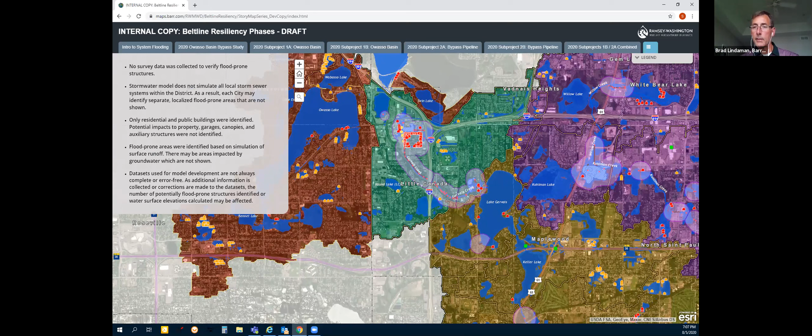Okay. And again, since I can't see everybody any longer, let me know when you're ready to go, Marge, if everybody's back and beverage in hand. Not making any judgments on what beverage you have. So Cliff is back. Marge isn't quite back yet. Brad, we'll go from you to me to Sam. Okay.

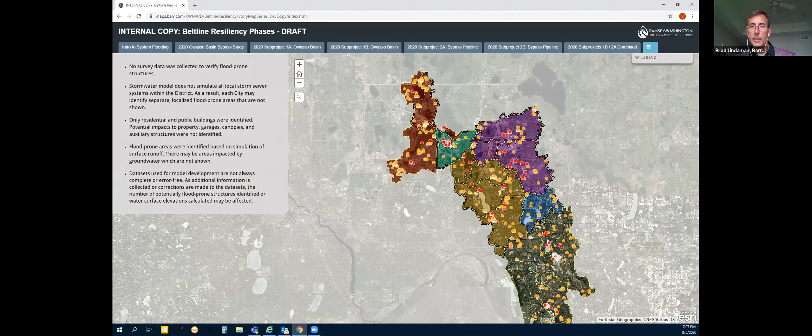So Sam, you still have control, right? Yep. Okay. I'm gonna zoom back in on that Owasso. You had it perfect before with the cloud there, right about there. That should be good. That should show up there. Yep.

I have a question, Brad. Yep. Will this be available for us to look at on the website? It will. Yes. And is there a report to go with it? Not yet. We're going to talk about that because a key piece of this is having an understanding of each of these elements to help us guide how you would like to see the report finalized. Because

I'll wait until Marge gets back, but that was part of kind of my overview of this. Oh, I'm here. I just wasn't sitting down. Okay. Is everybody else, again, I can't see everybody's picture anymore. Yeah, I think everybody is okay.

So what we're going to do, we're using the story map, and you've seen this story map in different forms as the Beltline Resiliency Study has evolved over the past couple of years. And so we're going to use this to look at details of what each of the feasibility study areas entailed, so you can get a better handle on how we looked at basically reducing flood risk in each of these areas.

A key piece of what we want to achieve tonight is having each of the managers be familiar with the story map and how to look into it further, because as I said, Larry, we're going to post this out to the district website. And so you can operate it and look at it and make sure you're comfortable with how we arrived at the recommendations we're going to give tonight.

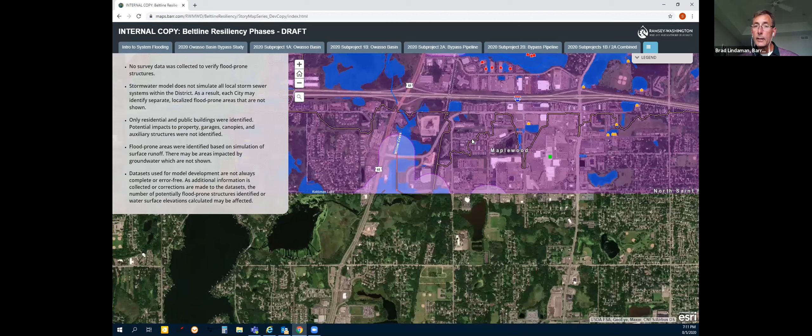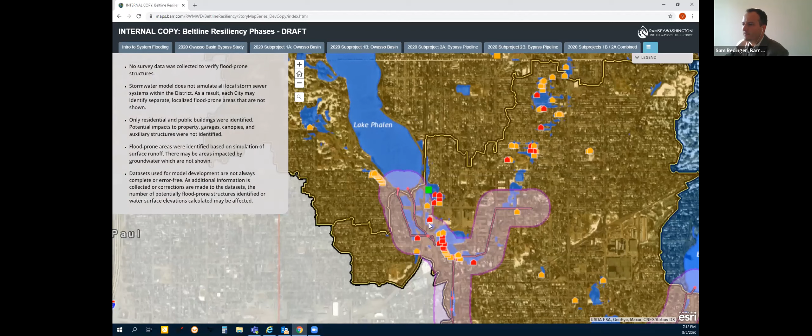So if you could scroll straight south to the south end of Lake Phalen, Sam. You want to go all the way to Lake Phalen? Like south end of Lake Phalen. Yeah. Got it. And so what we just looked at, we're in the upper portions of the Phalen chain, but another area that was mentioned in the status report is the Ames Lake area.

This also was identified in the Beltline Resiliency Study as an area that needed attention. So we'll talk a little bit about that near the end of the presentation, but just know that that's kind of the orientation when we say Ames Lake, it's to the south of Lake Phalen.

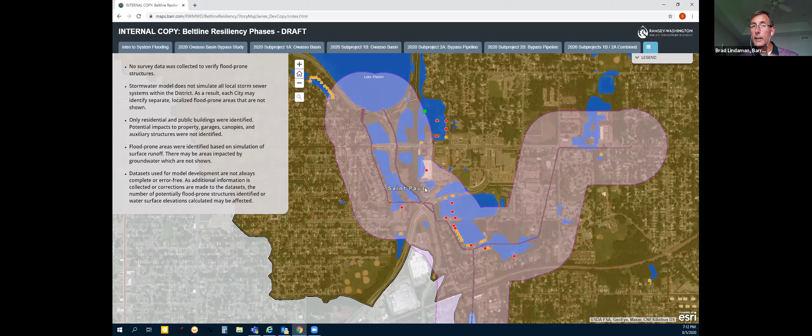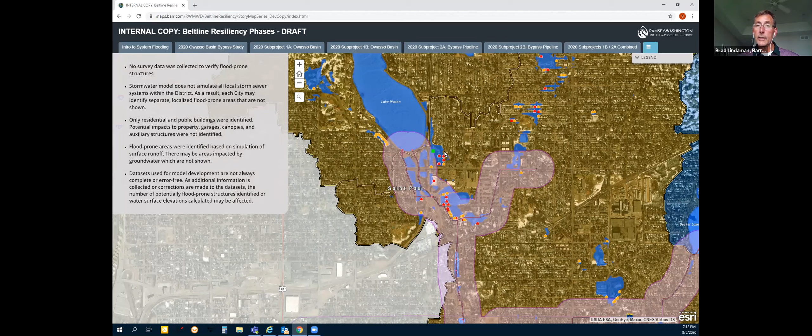And then the fourth component of the study that I will just briefly hit on at the end of all of our discussions is the Kohlman Creek system. And so if you go back up to Kohlman Basin and go straight east of Kohlman Basin or Kohlman Lake. Over here.

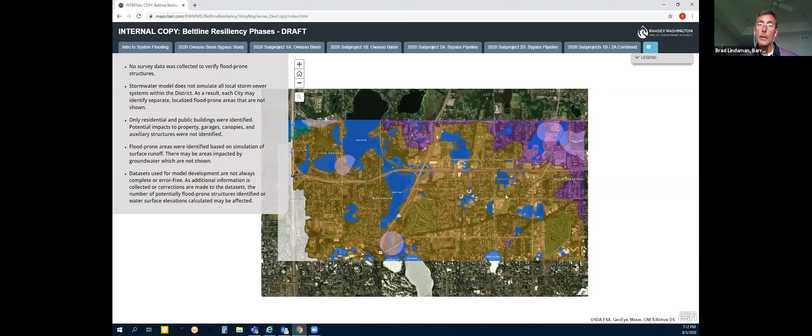This was not part of our scope for this work, but we do have a lot of information in the resiliency study that identified areas along Kohlman Creek. And again, this is Markham Pond. This is the PCU Pond, or formerly known as Target Pond, North St. Paul Urban Ecology Center. All of these areas have flooding issues along them.

But what we're trying to do is give you a sense of what it would take to address many of these flooding concerns. And so that's the order of how we're going to go through things this evening. We want you to be familiar with where these are in the district, how to navigate the story map, and then, at the end of this, help our team from Barr and the district staff guide us in one direction or another when it comes to the Owasso work, because depending on the direction that the Owasso area takes, it will help inform many of these other elements that we'll be talking about on the other side of the district.

So with that, I'm going to turn it over to first Matt Metzger, who has been one of the leads on the Owasso study, and let Matt explain the alternatives they looked at and how we arrived at a recommendation.

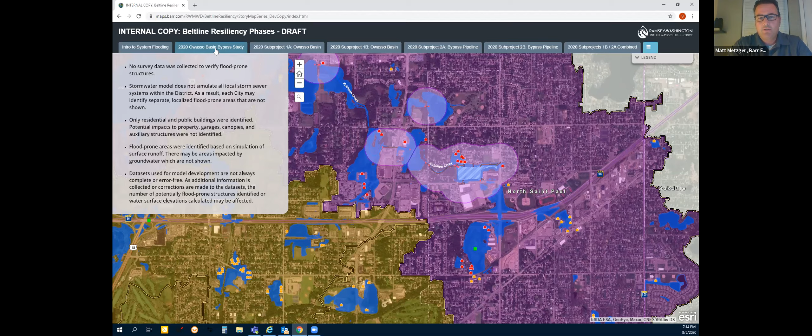This effort builds on the 2018 and 2019 resiliency work. We would consider that study to be conceptual pre-feasibility, and the level of detail of this study would be a feasibility study. To craft an alternatives assessment like this related to flood risk reduction, our Barr team sources ideas from our various team members across Barr. We have worked on similar flood risk alternatives assessment projects across the upper Midwest, ranging from $1 million up to $800 million, blending buyout projects as well as structural features and complicated multi-year phasing projects.

So we use that background to identify key study components and key considerations that show up in all of those studies, regardless of whether they're small or large studies. And that builds on input we've received in the past from the Corps of Engineers, FEMA, cities and counties, and the DNR. So that's where we're coming from with how we put this study together.

And where we start with an effort like this is we have to get a sense for the magnitude of the problem to be solved. So in the case of Owasso Basin, the magnitude of the problem is about 103 properties that are at risk of severe 100-year precipitation flooding, inundation following a rainfall event of that magnitude. And that's a big number.

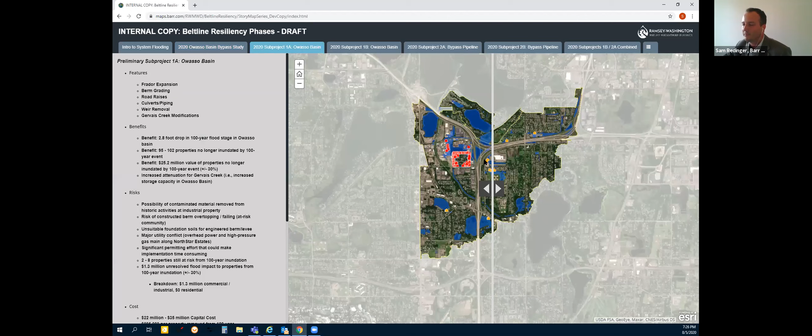For sure. So first, sub-project 1A, I'll go to that story map page. So this should be familiar to everyone. There is the slider bar. As you slide it across the screen, you'll see red. The red represents structures at risk within the 100-year inundation footprint. So we'll go through that.

On the left side here, you see a summary tab, which is intended to outline the highlights as the managers work through the story map and refamiliarize or get more familiar with these individual sub-projects. Later, once this is posted live, you will have this off to the side to guide your understanding of each of these sub-projects. Features, benefits, some risks regarding that specific sub-project, and then a couple bullets on cost here.

So starting over on the far right with the slider bar, moving it across. One thing that may be different with this is as the slider bar moves, you start to see some line work pop up on your screen. What that line work is representing are the individual components of this sub-project. As I mentioned, Gervais Creek is a critical element of the Owasso Basin itself in that it's its primary conveyance route downstream to the mill pond in Lake Gervais.

Currently, the hydraulic capacity of this creek is not optimal. It's got some sediment in it, creating some high spots. It's got undersized downstream structures at road crossings. So elements of modifying Gervais Creek or addressing some hydraulic concerns in that are included in each of these sub-projects. The magnitude of that Gervais Creek modification is dependent on what that upstream modification does, both locally and routing that flow into and through the system.

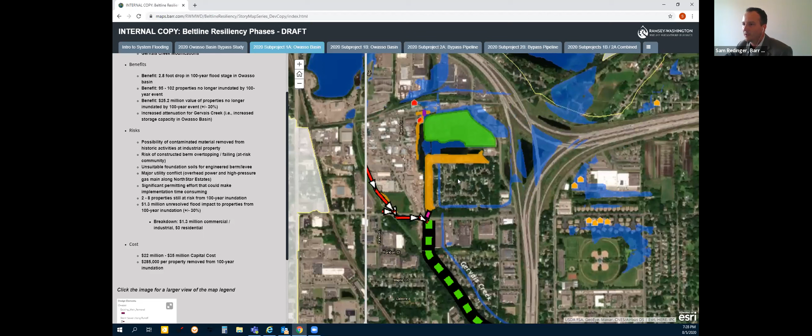So zooming in a little bit here on Owasso Basin Subproject 1A to describe what you're seeing on the screen. When you do come back and look at this, there is a legend down here, which will help give some context for the different shapes and colors you're seeing. So Owasso Basin, North Star Estates, Fredor, subsidiary of Fratellone Companies. There's a commercial district here on the west side of Owasso Basin, and then an industrial park further to the west. So moving from left to right, surface runoff from this industrial park here on the left does generate a high peak flow during the 100-year event.

So rather than routing that flow through Owasso Basin and contributing to a problem area, we're looking at getting that flow and directing it into Gervais Creek at a point downstream of Owasso Boulevard. So the scope built into this element of Owasso Basin is a diversion berm with a low flow pipe and then a higher flow pipe on the south side to direct that surface runoff into Gervais Creek. We took a look at the Owasso Basin footprint and the pond contours upstream and downstream and surrounding elevations to understand where our control points were in regards to the maximum level that Owasso Basin can reach.

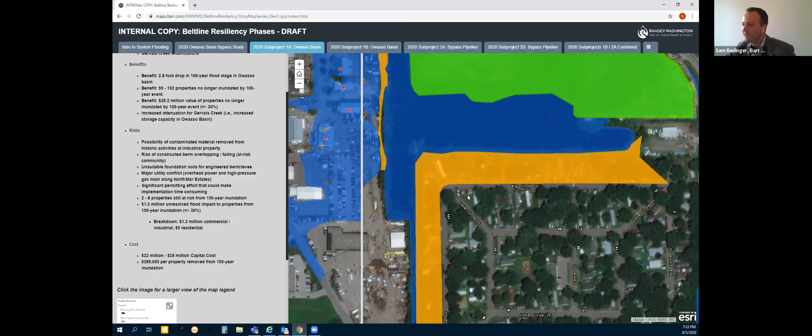No, good dialogue. And Pam, there's no such thing as a silly question. As an engineering professional presenting a technical topic, when we hear questions, it just reinforces that we have an interested audience. And so that's always a pleasure to have. And you know more than we do. We try, but I'm not going to say we do.

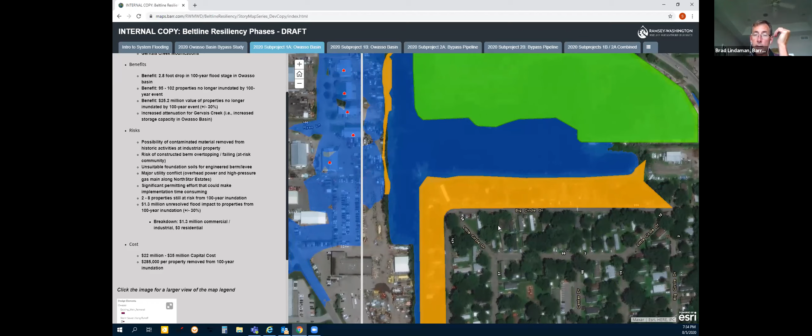I would say, Pam and Cliff and others, as Sam goes through the estimated costs, at least at this level, associated with projects of this type, we also recognize that these are high buck, high level of effort projects. These are not something you do next year. No. And so it would take a lot of coordination. It would take a lot of staging. It is something that could be done. And it's, again, why we kind of frame that up.

As you start to look on the left side, you'll see some pretty big numbers as we go through all of these. And again, if this is a direction that the board understands minimizes flood risk, but it also comes with a very huge price tag, and it's not what the board wishes that we pursue, there are other ways of essentially responding to emergencies that could be considered.

So, Brad, this is Marge. Is there any way that we could get state money or city money or county money, if we wanted to pursue this, to help with this? That's a question Matt has most experience with. Matt, you want to jump in now?

Sure. Yeah, we've been having that conversation amongst our team, knowing that the magnitude of the options we're presenting here are beyond what the district can fund in regular cycles on its own. So that would be one of our recommendations, is that if you were to go down the road of detailed design and continuing to advance some of these options, you would find a funding partner, most likely starting at the doorstep of the Minnesota DNR, looking for a potential 75% DNR cost share type of arrangement, where you would be bringing in outside dollars to fund some of these projects.

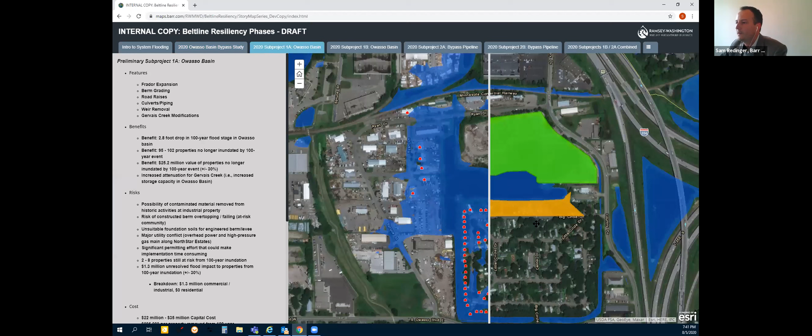Okay, getting back into Owasso Basin, this big green area, this is an industrial property, a subsidiary of Fratellone Companies. It's got a very big footprint that encroaches into Owasso Basin. And what this is showing is a property buyout or a land and property acquisition, and then an expansion of the Owasso Basin footprint itself. And that would be structure removal and demolition, and then dredging and excavation to expand that footprint to provide more local storage. Again, that'd be huge. A very large element of that scope for sure.

Other pieces are more of the, if you'd want to call them low-hanging fruit, but do contribute, do provide a benefit, include a localized raising of Ryan Road with a culvert upsizing to convey additional flow from some MnDOT storage ponds, and redevelopment or regrading of an existing berm here on the west side of Owasso Basin alongside the industrial park.

And then currently there's a weir that exists here near the outlet of Owasso Basin into Gervais Creek. This concept includes a complete removal of that weir. So it'd be taking that weir out to let the water get out faster and not have to maintain a certain elevation before discharging. Okay, so that's subproject 1A of Owasso Basin. A lot going into it, some very high dollar scope items for sure, just given the nature of them relative to constraints within their corridors.

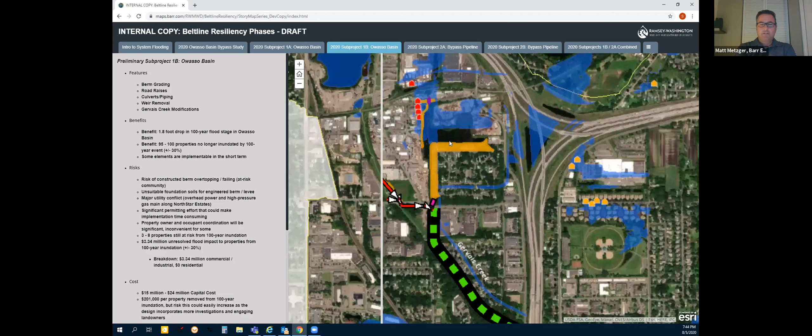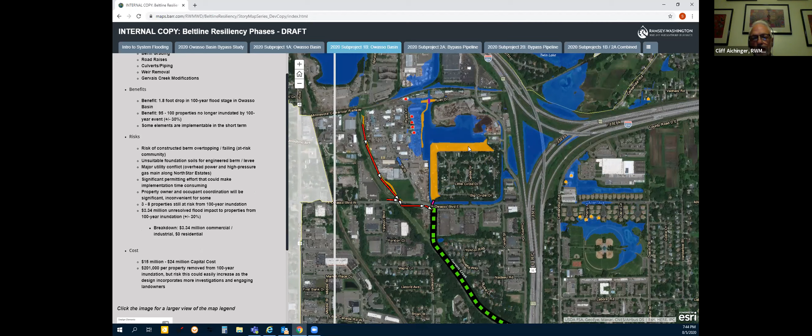So this plan doesn't involve moving and storing the homes. It still does. Oh, it does. Yep, that's this berm footprint here. Okay. It doesn't involve the buyout, it looks like, of the big property to the north. Correct. Okay. Or the excavation of that. Yes, after the buy.

Right, and Sam, a quick other thing. So I'm just thinking as you're going here, well, gosh, we should just move on all the low-hanging fruit now that you mentioned, like clearing out the creek and the culvert and raising. So I'm hoping that you're going to tell us what that would be too, the things that are quick and easy that we could move on.

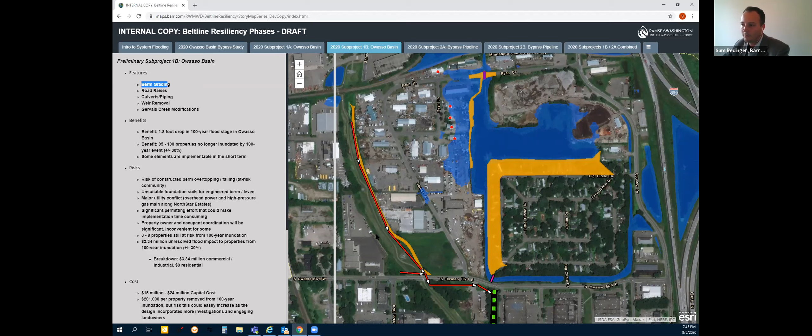Yeah, and if you look up here on the left side of the ribbon, you'll see berm grading, road raises, culverts and piping, weir removal, and Gervais Creek modifications. These are the features being presented here. The berm grading is the biggest ticket item of this scope. The other elements are the lower hanging fruit that can be implemented in the short term, and wouldn't require extensive funds to execute.

Cam, is that you? That's my dog. That's my dog. She barks at everything.

As you look at that list that Sam is pointing out on the left side of your screen, we wanted to make sure we captured that there are in these areas major utility easements and conflicts that have to get dealt with when a project goes through. At this stage we allocate dollars and try to account for that in our budgeting. But when these projects go through these developed areas,

remember that property buyout, when we use that term, that's always a voluntary, negotiable thing. We have to work with them to come up with a situation and a price that's agreeable and advantageous to each landowner, and each landowner can act independently. They have to be engaged independently, I'll just put it that way. And that can take time, and that can take a lot of conversations. Yeah.

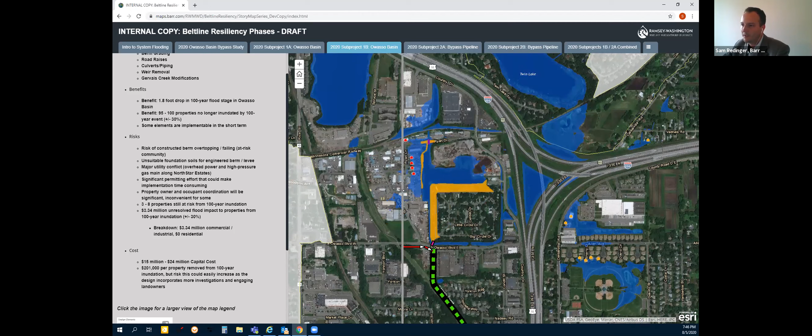Yeah, so a key takeaway from the Owasso Basin elements, either subproject 1A or 1B: both of these scopes have a very large reduction of impacted homes in the 100-year inundation footprint. They do come at a high cost given the nature of the scope elements in and around this area being as congested as it is.

You also have interesting geology, to say the least, based on historical soil borings that we've looked at and reviewed. It's very sporadic as to whether you're going to find peat, silts, organics, or weak and loose sands. So you don't have high strength material beneath you. So structural elements like a berm that would be creating a flood wall up against homes would have some extensive engineering going into it.

And on top of a poor foundation, that includes a lot of unknowns at this stage, but also a lot would go into that to make sure that it's safe, that the appropriate factors of safety are there. Well, in our past work on the Owasso Basin, we found that that whole North Star Mobile Home Park is placed on a fly ash pad over some pretty significant peat, right, Brad?

Yeah, there's borings of like 30 to 40 feet of peat in some of those areas. And they used fly ash to stabilize, back when there weren't regulations on that, to stabilize that pad where the mobile homes, or the manufactured homes, are parked. Putting that much weight on top of the old fly ash pad, would that be an issue?

I would think. But we have ways of engineering that, basically taking a staged, longer period to compress the peat, so it compresses to a point where it can support it. But yeah, it's not straightforward, and it wouldn't be a quick construction or design process.

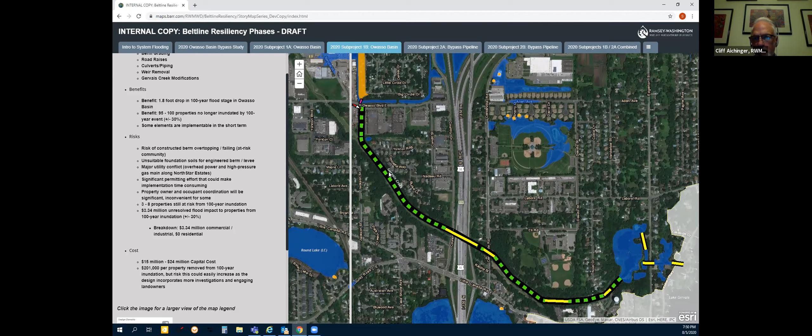Did you look at, rather than just a clean out, some way of making that channel more efficient, like piping it or a concrete channel or some of those kinds of options? In discussions with Brandon and Lulu Fang, another engineer from Barr, who were heavily involved with the resiliency study, my understanding is that concept was evaluated. I don't know the basis for why it was taken off as a viable option.

For this study, though, we did not look at doing any sort of permanent lining along it. We do have an option that you'll see in a bit about supplementing the open channel flow with a pipe next to that creek. Okay. All right.

Moving on into subproject 2 is the bypass pipeline.

And this is where I get real excited. You get really excited? I get really excited.

Sliding the bar over, you can see the benefit of a pipeline. So in and of itself, you don't take as many of the homes out of the 100-year inundation footprint as the infrastructure for Owasso Basin. You do have still a very high reduction of impacted homes. And a key takeaway is this is looking at just a bypass pipeline in and of itself. It does not include,

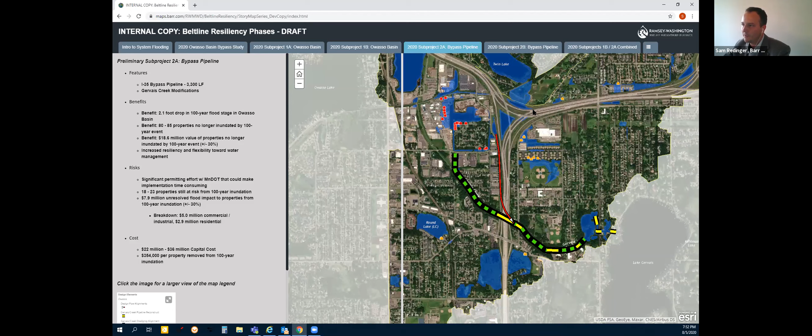local infrastructure projects to protect these 8 homes here at this corner, or the road raising. It's just strictly looking at the magnitude of impact of the pipeline in and of itself. This pipeline from the east side of Owasso Basin here during the 100-year storm event, you see roughly 200 CFS of peak flow moving from the MnDOT system, Twin Lake, this area over here and upstream, through the Larry Pond pipes into Porky Pond and subsequently into Owasso Basin. That's a very high peak rate. That's 90,000 gallons per minute.

So comparatively, what is the cost ratio on that? So you'll see some summary figures near the end of this. That'll help compare them side by side. Oh, great. Yep. So we'll get into the cost benefit, capital cost per property protected ratios. So you'll see a concise summary that'll help you grasp that a little better. You folks are just awesome.

Did you look at doing this bypass pipeline along with the low-hanging fruit items that you identified in the earlier option? For what you see on the screen, Diane, no, not in this specific instance, but from an overall perspective, yes. And we didn't look at optimizing configurations at this stage. It was more of, okay, we see that you have 12 homes or businesses still impacted. Our detailed design intent would be, for example, if you went with this as a baseline, to look across the range of the sub-projects and yes, look to see if we could suggest some smaller parts of those other ones to mitigate those remaining issues.

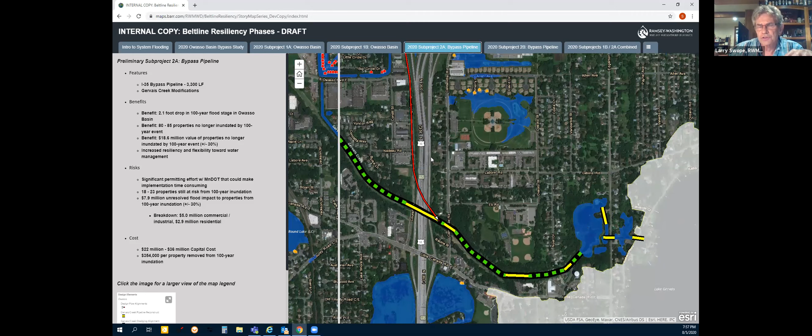I have one question. If we improve Gervais Creek to get the water out of there faster, do you look at during the event the water would come up, it might come into North Star Estates, but go down so much faster that their inundation would be reduced to a place where they could deal with it? What, Larry? I don't understand. Well, if you're moving water out of there faster, part of what happens in a flood like this is you have the big rain, the water comes up, it comes into North Star Estates, but your goal is to get it out of there as fast as you can. So if we make the investments to get the water out of there as fast as we can, then do we mitigate the effects, even though they're still there?

I mean, those houses, those structures are, we talked about this before. They're raised, but people put things under them. I get that. Yeah. But if we're looking at 5-6 years to get funding for this, are we better off to try to figure out in the short term how to get the water out of there as fast as we can, so that we reduce the amount of pain these people feel if it does flood?

I think conceptually there probably is benefit to that, and we could show to what degree that would be through modeling. So I think I understand where you're headed, Larry. If we're waiting for funding for 5 years, let's at least improve the system downstream, because that seems a bit more affordable and something that we could bite off as a district in anticipation of that. And we are helping things along the way and building towards a bigger project. Is that kind of where you're headed?

Yeah, and I would conceptually think of having an emergency plan like we have for a lot of things that says, look, we're having this event. People in North Star Estates, here's what you have to do. The water's going to come up, but our modeling shows that if we hadn't done anything, the water would come up and it'd be up for a week and a half. As we increase the efficiency of getting it out of here, you're going to be up for a day, but then it's going to go back down again. That's what I'm looking at, is mitigating the issues.

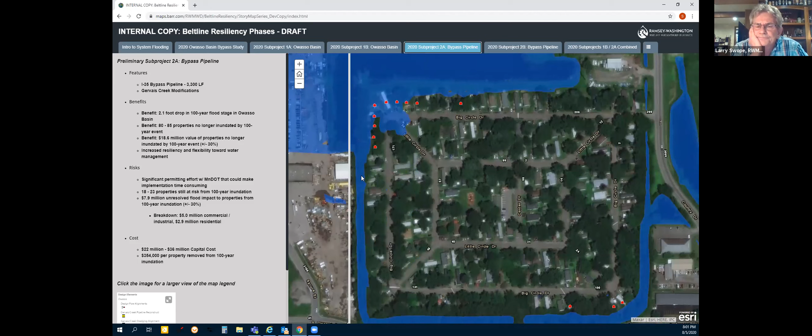Has there been any discussions directly with North Star Mobile Home Park yet? No, not to my knowledge. I'm looking at this diagram here now showing those dozen or so up in the corner. They may know of options that could be pursued to just basically lift the home, not necessarily berm it. Maybe if we raise the roadway and lifted a few homes, it'd be a lot less of a magnitude of project. It might be doable, but we can talk about that later when we get to phasing. Yep, all good discussion points, and it just shows us that you guys are thinking the right things. We like to see that.

So the pipeline itself would have an outlet at Porky Pond. It would come down, generally follow Country Drive in the I-35E corridor, and make a 1,500 foot to 2,000 foot radius to pass under I-35 and discharge downstream of I-35E. Many of you were in Beltline when we facilitated a tour during that active construction project. This tunnel isn't as big as Mainline that we went in. It's 7 feet; there are elements of the Beltline interceptor that are that size.

And then constructability, we looked at how would we put that pipe in from point A to point B. Looking at existing topography, this is a very large hill here. And at the midpoint of this pipeline, to have a gravity drain pipe, you have close to 50 feet of cover. Wow. That's a lot. You have a tight corridor, you'd be looking open cut. The takeaway is unfeasible. So we'd be looking at utilizing a trenchless excavation method.

In this specific instance, it would be a micro tunnel boring machine or an MTBM. The only difference between a micro TBM and a TBM is that it's remotely operated. You don't have anybody in the pipe at the cutter head itself as the excavation is occurring. You would TBM this from the downstream point working uphill, daylighting at the upstream end, and it would be installing the pipe right behind it as it goes up. So by the time your cutter head goes in here and comes out upstream, you have a complete pipe behind you. It's incredible technology.

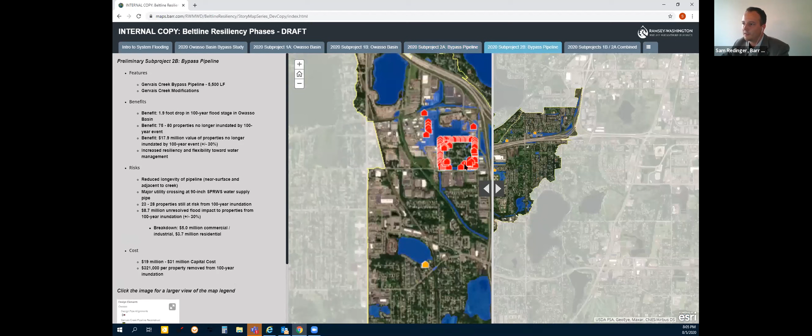And realizing that, we recognize that there's a lot of merit to having a pipeline to bypass that peak rate of 200 CFS. Cut and cover down this alignment, not feasible. But we looked at, what's another alternative to getting in a pipe, to rerouting that flow. So Subproject 2B takes a look at a pipeline concept, but a separate alignment. And the focus of this alignment is utilizing the existing creek corridor and burying a pipe in close proximity or adjacent to that creek bottom. So you effectively go from one extreme of extreme depth to essentially no depth. And you save a lot of cost in terms of installing the pipe itself.

Well, Sam, what kind of diameter? This pipe looks so practical compared to the other one. Yes, but at the same time, this area is very flat. It's 5,500 feet long. You've got, I don't want to misspeak, but it's like 5 feet of drop over that period. It's very, very flat. And so getting a pipe from here to make your inverts and hydraulics work, we can't put in as big a pipe as this guy because we don't have the cover along the corridor. And second, we have to put in multiple pipes to make this feasible, because with a shallow cover, you're restricted to using an arch pipe.

We've got a 36 inch tall rise, 58.5 inch span arch pipe. 3 of them coming from Porky Pond, following the alignment here, connecting with the junction box, transitioning to 2 arch pipes. And the intent of going from 3 to 2 is that we would have an outlet in that junction box, which would route excess flow during that peak event into the creek itself, with the focus of getting that discharge to a downstream point of Gervais Creek. So the pipes are a good idea, but they don't seem very practical. Great idea. It doesn't save a lot of money.

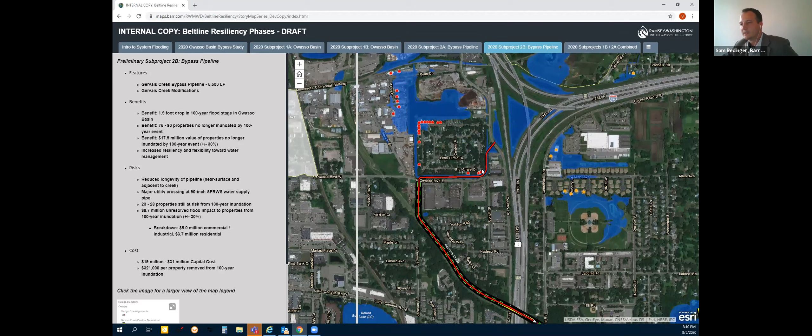Okay, so those are the 2 big infrastructure pieces of addressing this: subproject 1 and subproject 2, further broken down into the A and B. Looking at how we would combine these, we wanted to provide a visual of what Owasso Basin infrastructure would do in addition to the bypass pipeline. This is what it looks like on the screen. We analyzed it. We have additional details on this in one of our summary tables here at the end.

But just to help, there were a lot of comments on, well, what about the weir? Well, what about raising Ryan Road? This will be an effective story map link to help you visualize what could be combined and how, both for Owasso Basin and the I-35E bypass pipeline, as well as Owasso Basin and the Gervais Creek alignment pipeline.

Our intent with showing you those, like Sam said, was to get us thinking about what's complementary with these different options, but we wouldn't necessarily propose doing all of everything shown there to the greatest extent possible. You'd have to optimize it. Yep. Meaning we have to optimize it, meaning what? Meaning us during detailed design.

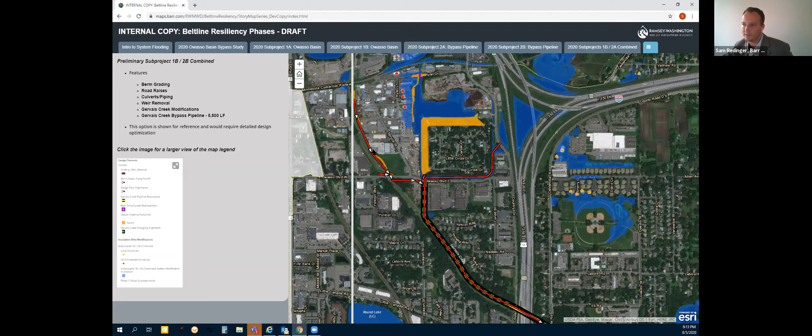That's a very good point, Pam. And in fact, there is a separate study that's ongoing, looking at water quality aspects and kind of piggybacking off the different concepts, not included in this study scope, but a separate study. But that is tracking on the side as well from a water quality standpoint.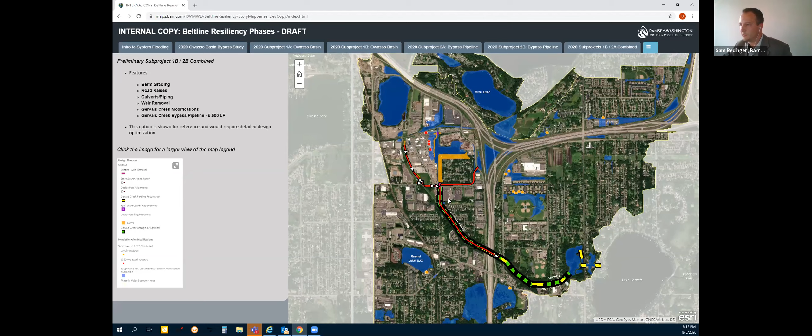Okay, so we've marched through the different sub-projects. Hopefully everyone has a better understanding or is able to conceptualize what that means, what it would take, what sort of commitment each of the sub-projects would involve. If I go back to the landing page here and I go to our sub-project summary matrix, this looks really busy, and it is really busy.

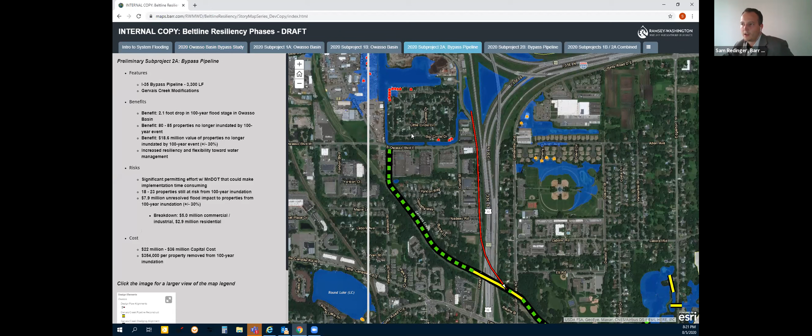And quick question, if we were to buy out the homes, that would also create a huge opportunity, correct me if I'm wrong, to increase the basin and increase storage and improve habitat. Is that right? That would be correct. Yeah, you'd have a lot of options to utilize that land if it was district owned, for sure. If we bought them out, we'd own that whole square. Yes. Correct? And what could you do with that? Depends if you want to get into that fly ash cap or not.

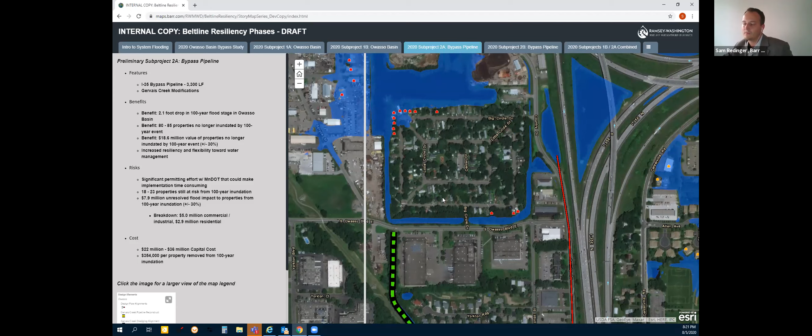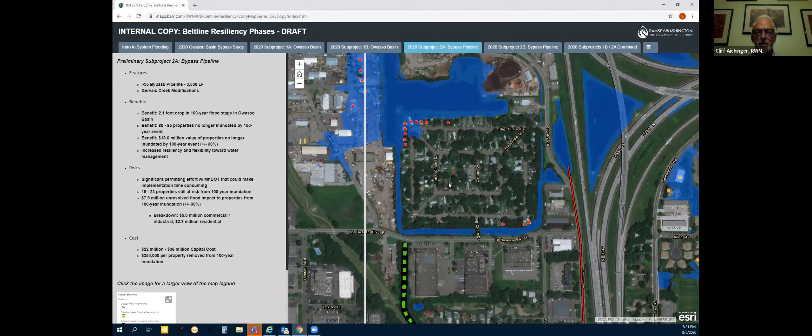Well, just a question. Could you make it into a park? Could you make it into assorted holding ponds on the property? What could you do with it? And again, not detail, but just an idea. That is something that we would want to talk with the City of Little Canada about, and obviously the landowner at some point, but the City of Little Canada has comp plans for this area, and we'd want to have that discussion with them to see what their vision is for this area in the future. The mobile home park qualifies as their low-income housing allotment, so yeah. That's right. They would be reluctant to give that up.

But also, just a point of clarification, Sam and Matt. The costs that we're showing in terms of the buyouts, those are just to buy out the affected properties and not the entire park. We don't have a number that's the cost for the entire park. I just wanted to clarify that. Correct. Yeah, that's a good point. Yep, it's just the structures in red. And when you're thinking about that, remember, if you are talking about tens of millions to buy out a large segment of the community like that, the DNR would weigh that differently than if you're protecting that same part of the community. Yeah, it was just a thought. It's fine. How feasible, I don't know, but apparently not very.

Well, it'd be interesting to talk to North Star Mobile Home Park owners just about what they feel about it. If they're aware that regular flooding might be a possibility, how viable do they think the park is anymore? It wouldn't hurt to have some conversation at some point. Yeah, I think as part of the work this year, we do have a budget item for emergency response plans for affected areas of the district. And that's one thing that we would be getting into, more direct conversations with the property owner, which is unfortunately a very large national company, one of the bigger ones, which always makes things difficult. But we would be getting into more discussions and a more pointed look at the individual manufactured homes throughout the property.

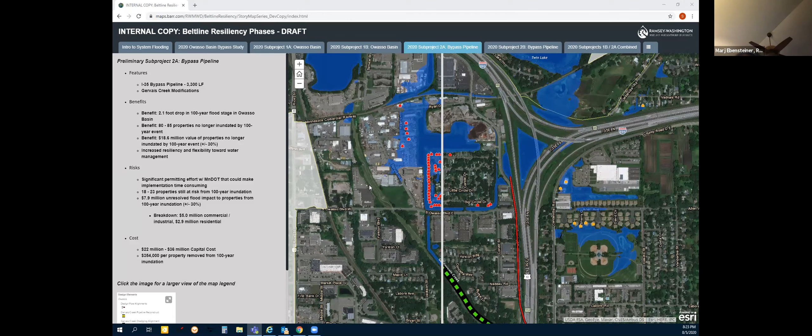Well, isn't that kind of a good place to start though, just to start a conversation with somebody there? Yes, for sure. And so that's what I'm saying. We would be digging into that anyway as a part of an emergency response plan. So getting conversations started is definitely on the short list of things to do. I just want to insert that each one of those lots represents a lease that the landlord would be obligated on. So the sooner the better on that too, because as leases come due, maybe they'd enter into month to months instead of long term. So that difficulty could maybe go away over time.

Mm-hmm. Oh, that's a good point too.

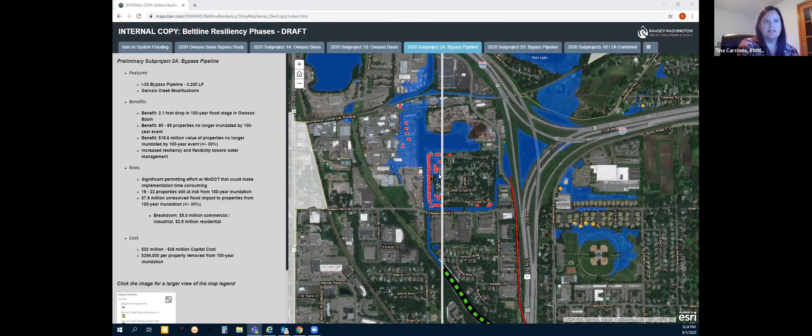Yeah, I think a next step on this study in particular is to meet with the City of Little Canada and share this presentation similar to how we're sharing with you, get some feedback from them, and also plan to have discussions with the mobile home park or the manufactured home park.

Like Erin said, emergency response planning is still on the top of our list for this area in the meantime, especially with the long timeline for some of these projects. So we'll be needing to talk with them about that as well. So. Mm-hmm.

Are we done now? Not quite. I got one more treat for you. Okay.

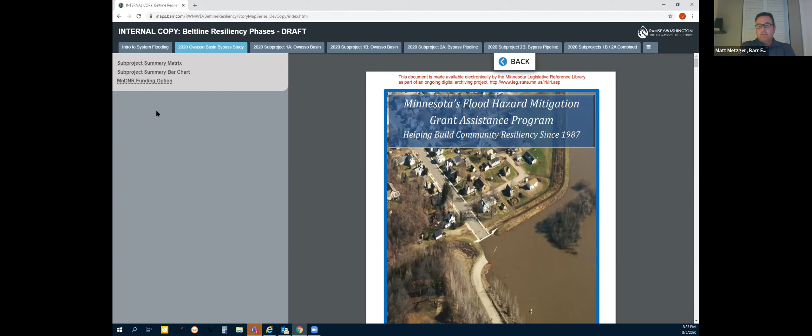I can say also, as we're talking about this, this document Sam has on the screen is a good reference to help think through funding. One of the examples in there is a buyout program from Clay County, Minnesota, where they purchased about 44 residential buyouts to the tune of about $10 million. So that's about $230,000 per property.

Okay. If you remember Sam's earlier summary, we think that these project alternatives, be it buyout or structural, we're talking about something to the tune of $250,000 to $300,000+ per home. So I bring that up because that means that potentially, depending on what we'd find in detailed design, you're at about a similar benefit to cost ratio that we know the DNR has provided funding for in the past.

The fact that you're looking at project alternatives that are a similar dollar value to what it would take to acquire all those properties and remove them from the floodplain, the fact that those are close, puts you in a favorable position to start that conversation about funding. No, you're right, but we haven't started a conversation with anybody yet. This is our first step with you.

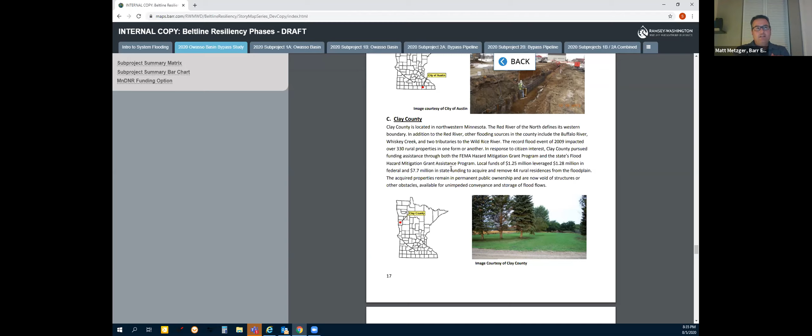Yep, the first step in helping each of you get an idea of, there's a lot of homes there at risk of flooding. Here are alternatives that would help mitigate and remove those homes. This is what it would take. And that's our job, to take a look at that. If we were developing this and we had seen something where the cost of a project was 10, 15, 20 times what it would take to acquire the properties, that's a different conversation than if those numbers are close.

Okay. And a project like that would not be looked at as favorably or feasible or implementable. So that can get weighed along with all the complicated, numerous competing factors you have to weigh when you make these decisions.

And as far as the low-hanging fruit pieces go, that's something right now we have a placeholder. When we talk about the budget, we can talk about that, but we have a placeholder in our flood risk reduction fund for projects that will come out of these feasibility studies. And if there's things that we want to look at from here or from the Willow Lake or some of the other studies, we can bring those forward in September too, with at least for 2021 preliminary plans for what we could pick off in those and what the benefit of doing those projects would be.

So Tina, you're saying that we will have next month a list of the so-called low-hanging fruit that we can do, I think in not only this area, but other areas. Yeah, I'll ask Brad maybe to pipe in, but I think we can have a starting list and some preliminary idea of what we might want to do in 2021 or could do. Yep. Well, that's great. That's what we need.

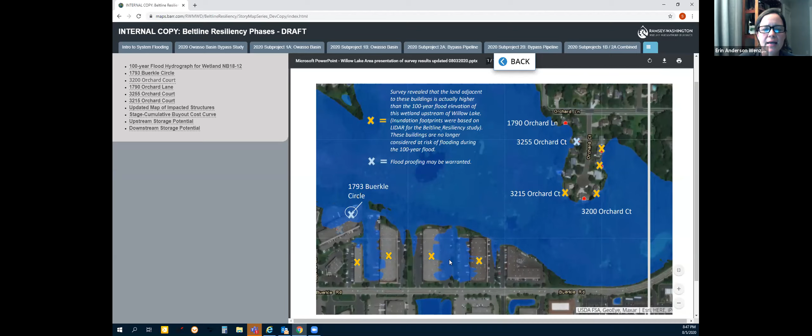So all of these X's or the red dots here were places that were formerly red houses in our overview map that we were looking at earlier in this area. Anywhere where there's an orange X is an area where survey and updated modeling revealed that these homes are not actually at risk. The flood elevation is lower than we originally estimated, and/or the low entries or low home elevations of these buildings are higher than we anticipated. So anything that is orange, we're not actually worried about now. So that dropped a lot of them out of concern.

The blue X's are anywhere where we're close, or right at maybe the corner of a building, not a low entry, but maybe at the edge of the building, where it may make sense to inform the property owners about floodproofing options, but where we're not actually too worried about water coming into the building or the business or the home. Anywhere where we have red little houses, so 1790 Orchard Lane and 3200 Orchard Court, those are properties that do still have low entries below the updated 100-year flood elevation. So those are still properties of concern. But the good news here is that we went from 12 down to 2.

And also just seeing where these properties are located, it seems like we might be able to do something site specific with grading, or we could approach this with an emergency response procedure that would protect them in the event of a flood. Also, going forward, we are looking at some storage options that would be both upstream and downstream of this area. And I'll show you what that looks like. But maybe I'll just show you the ones that are in blue X's or the red. So why don't we show 3255 Orchard Court, Sam?

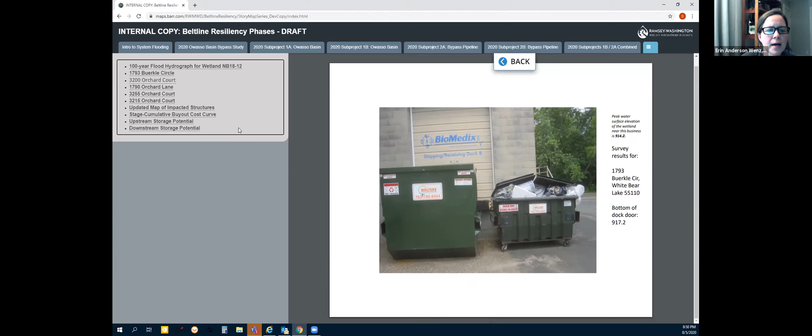Oh, I guess it's just the bottom of the building there is still slightly above the flood elevation too. So that one's not even really encroaching much on the building. So let's go to the 2 homes that are still low. So I think it was 32, let's go to 1790 Orchard Lane, right there, yep.

So this is where there is concern. So we have at the southeast corner of the house, to the right side of the bottom, actually it's the small inset photo there is where that shot was taken. And when you're looking at the other photo, it's to the right side of the photo there. That's the edge of the southeast corner. But the bottom of the sliding door is at 913.6. So that's 0.6 feet below the flood elevation.

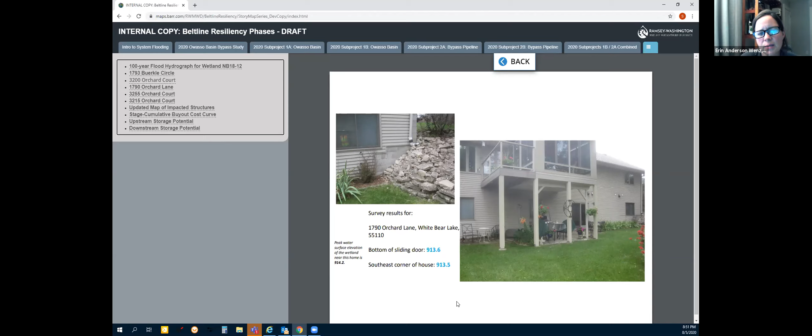So that property deserves a little more evaluation to see if there's some site-specific berming or some landscaping that could be done to keep the floodwaters off of that house. And then the other one, I can't remember which the other house was, 3200. So one up there. Yep, right there.

So this one also, the southwest corner of the house is shown there in the inset, and then you can see the garage door there. The bottom of the garage door is at 913.4. So again, it's below that 914.2 elevation. So again, here, the next step is to look at some site-specific options right around that property, but also, and this is where we can move to the upstream storage potential slide.

This is just upstream of this area. This is a golf course and park property, and it may be that we could hold some floodwater back on that property during the peak of the storm to drop the flood elevation in that wetland area as well. So that's something that we'll be reaching out to the city about to see if there's some upstream storage that we could be doing on that park property.

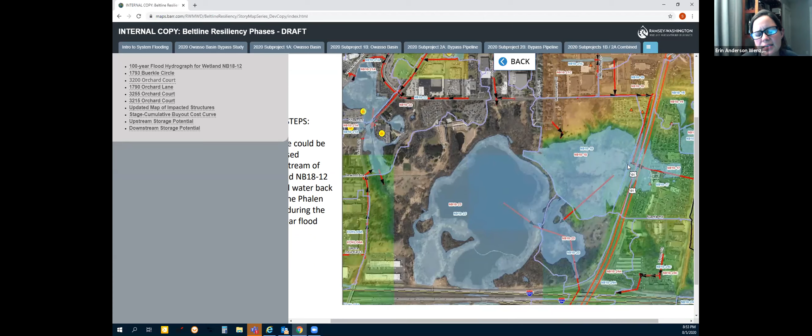And then also downstream storage potential. This is also something that we've suggested could be looked into in a little more detail for next year. So I'm going to have Sam show the big blob there in the center. That's Willow Lake. And then the wetland just to the east, the north and east side, right where his cursor is, that area could potentially have water held back there as well if we did some berming and changing of outlets.

And the reason we would pursue that is not necessarily to the benefit of those upstream homes, but to take pressure off of flows coming through the Phalen chain if we thought that that was part of the overall strategy, that we could actually slow flows down upstream in this area to the benefit of downstream areas and to allow flow to come in further downstream than didn't before.

And the reason we bring this up here is because the resiliency study originally looked at this element being part of mitigating increased flows coming from the wetland with the low homes around it. But that doesn't seem to be necessary given that it's just 2 homes. There's likely things that can be done at a smaller scale, and then also with the assistance of increased storage in that golf course area.

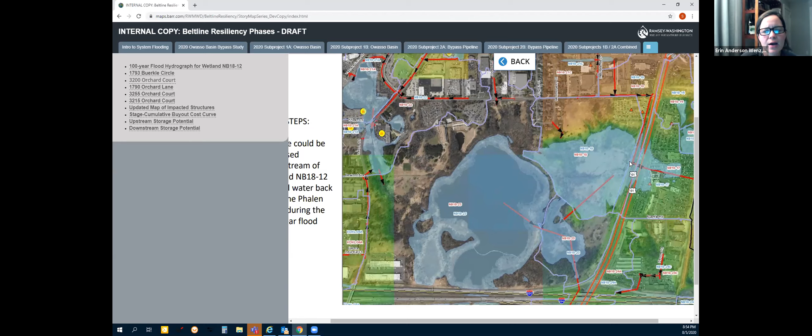The last thing that we looked at is the stage cumulative buyout cost curve. I'm going to click on that slide. This is where we were looking at the value of those properties, just like we walked you through with the Owasso bypass study. And this is just showing why we don't think that, for these 2 homes, it would necessarily be warranted to put in a pipeline under Highway 61, which is what was the concept plan from the resiliency study.

The cost of doing that plus increasing the storage in the Willow Lake wetland complex area to mitigate any increased flow downstream would have been $10+ million. And when we look at the estimated buyout cost for the 2 homes, it's $1.2 million. I'm not suggesting we would buy out those homes. I think there's things we can do to protect them at a smaller scale. So with that, I know I ripped through that pretty fast. Does anyone have any questions about that?

Oh, but thank you. That was one comment. It sure does show how important it is to go out there and do site-specific investigations, because look what happened. Right. Exactly. Yep.

Hello. Yeah. If there's no other questions, that's all I was really going to share on that study. I don't know who I pass the baton to now. Who's up next? I just want to jump in with this one too.

Then Erin, would you recommend that we continue the emergency response plan for those 2 homes to look at what could be done specifically for those? Yeah, and I think in particular with these, that ends up being looking at where a sandbag alignment could go and providing the city with some guidance on that. I think what we would also do is look at options that would involve maybe permanent, if it's not a big, huge berm in someone's backyard, but something that could be more low profile, we would think about that as we're looking at the sandbag alignments too.

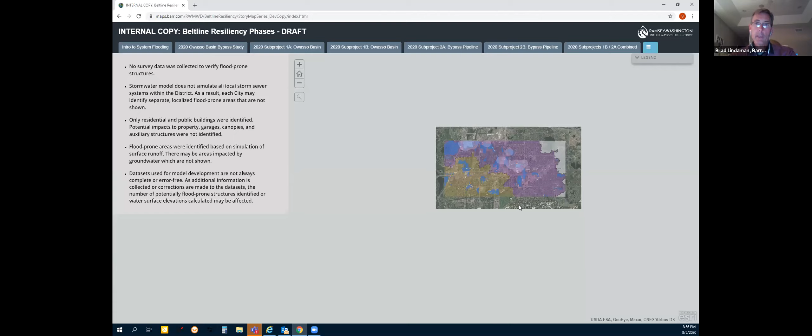So we're looking at the Ames Lake area again, but there's not a lot of information to share other than we have been in contact with the city of St. Paul. In many of these areas, you can see the homes in the area that's coming up on the screen now that are in the floodplain. Many of those are actually what we believe to be more localized issues. And so we need to talk to the city of St. Paul about the information that we've come up with through our analysis, share that with them, help them with partnering and how to maybe analyze these further.

And in most cases, I believe, at least at this stage, that many of those will be improvements that they have to program into their own implementation programs. But our contact for the city of St. Paul said, we'd rather delay this meeting until later on this summer. We've got a lot of pressing issues during the summer. So they have asked for maybe later on in August or early September getting together to have that first initial meeting. And we believe there will be additional meetings that are going to be necessary to start to deal with these things.

Some of these may be created by challenges in the Beltline, so we would look at that and help them with that analysis. And there could be capital improvements coming out of it, but I think there are other items that the city would deal with first, and this would not likely be part of the 2021 budget for the watershed district. So are there any questions about this area? Again, we don't have a lot to share at this time, and we've been asked by the city to kind of delay the meeting until late summer, early fall.

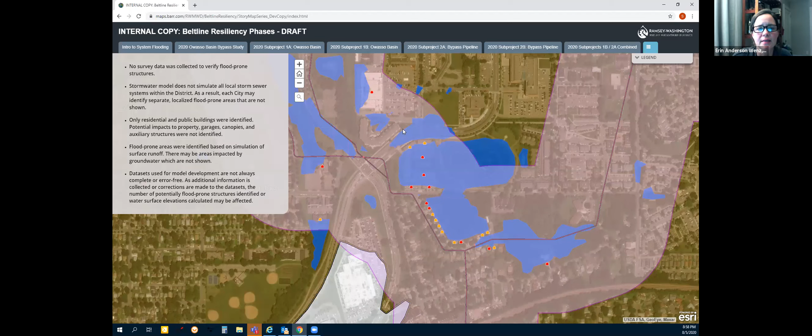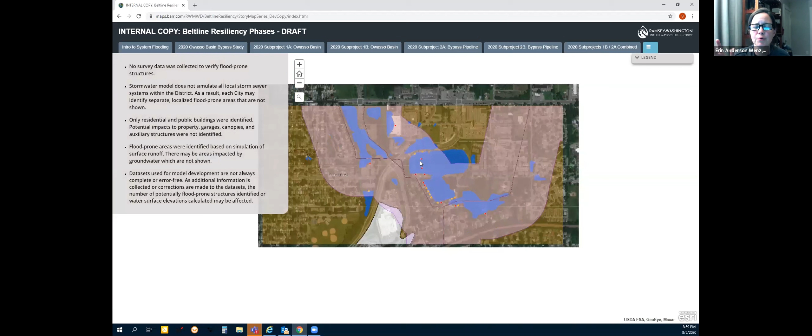So Brad, I think your approach is great. End of story. Okay. Brad, I'm just wondering if you survey these homes like you did in the other one, if some of them would drop off too. So that's an excellent point, and the answer is no, we haven't. And part of that is because there are so many. It's actually not just this area, but there's some other outlying areas as well. And before doing that, we'd like to meet with the city and make sure we understand what their thoughts are about the area, if they have any as-built information, and really get them involved from the get-go before we run around and collect that information. But yeah, that has not been verified on the ground yet.

Yeah, on the other hand, if the city knew that there were only 4 houses instead of a couple dozen, it might be something they'd be interested in taking care of sooner. Right. Yeah, we'll definitely have that conversation with them, because that's a good first step in that process. Yeah. Yes. Okay, Brad. Okay.

Larry, you wanted to talk about the budget. I do. Just one moment. Just want to make sure our staff, you're good with direction. You're feeling like we know where we're heading next before we move on. Yeah. Yep. Good. All right.

Okay. Well, thank you for your interest and the questions throughout all of the presentations, in particular around the Owasso area. I think that was very helpful for us to hear, and we were glad to be able to share that with you. So I think we have a good idea of what the next steps are. Great. We're ready to move on to the budget. Larry? Right.